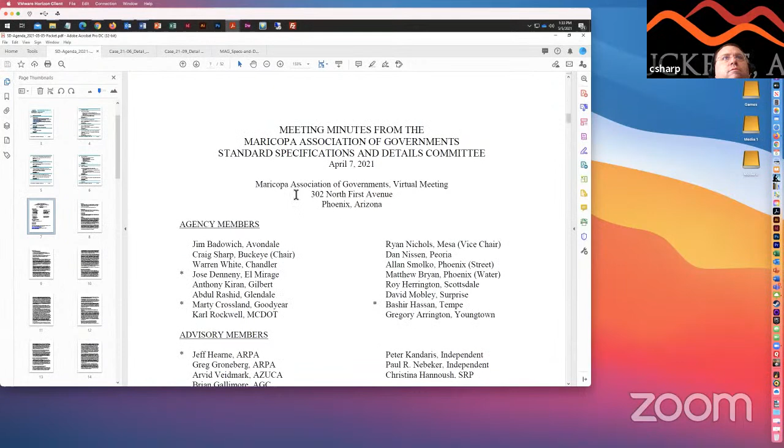Moving on to item number 3. Approval of the April 7th meeting minutes. If everybody could take a minute or so, go through those. And after that, we can do a verbal motion, second, and approval. Maybe about a minute or so. While people are looking over the minutes, I want to pull up the attendance and make sure that if there's anybody that's not on the attendance list checked, let me know.

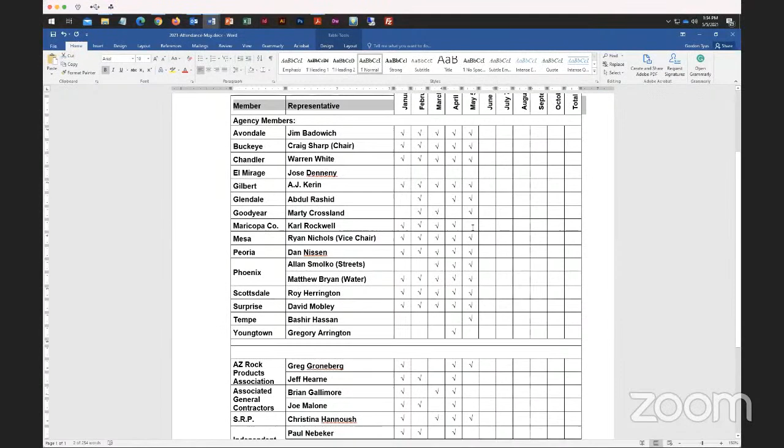So I'm going to share my screen real quick again. So Karl Rockwell, I don't believe was going to be on. Is there someone here from Maricopa County as a proxy for him? Yeah, I'm in. This is Ken Akuare. I'm sitting in for Karl. Okay, thank you. And Gregory Arrington, are you on? Jeff Hearne? Gordon, Jeff had a funeral to attend today.

Okay. Is Brian Gallimore here? I talked to him this morning. He said he was going to be on, but. Joe Malone? Paul or Peter? Are either of you on yet? Peter Kandaris, I'm here. Great, thank you. Okay, thank you, everyone.

So if we can do a motion and second for the approval of the April 7th meeting minutes. We get a motion? This is Warren, I'll motion. Thank you, Warren. And a second? This is Roy, I'll second. Thank you, Roy. If we can get a verbal aye for everyone who's for it, approval. You need to do a roll call vote since we're meeting remotely. Meeting remotely. Okay. Do you have the list up? There we go. It should be up now. Yeah, I've got a number of screens open also.

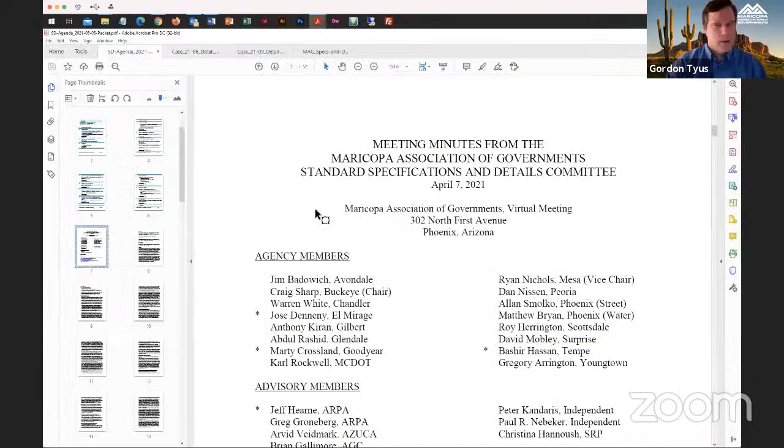Moving on to the staff report. Looks like, Gordon, you've got something there for a back to office plan. Yeah. I don't have a whole lot to report in your packet. I included this handout that kind of summarized what the plan was. And in July is when they're talking about starting phase 3, reopening our office, but they're only going to have a maximum of 15 employees per floor. And there's not going to be any outside meetings in that phase 3.

So it's not until phase 5 when they're going to have the office open to all member agencies and visitors. And the earliest they talked about doing that was in August. I suspect that's not even going to happen. As I was talking earlier with one of our IT guys, they still have to test out putting computers in all the meeting rooms and being able to broadcast Zoom through our video conferencing system and all these things. So I think it's probably likely that we're not going to have any in-person meetings for this committee the rest of this year. We're supposed to get another update at our staff meeting on Friday, but that's about all I know right now.

Do you know, is the intent after, let's say, August, is that going to be a joint in-person and virtual meeting platform? Yeah, when we do start in-person meetings, they're going to continue to have the Zoom meeting option. They want to do that for all the committees that have been doing the Zoom meetings now. And so that also means we need to make sure our meeting rooms are capable of feeding the participants that are in the room, the mics and the video from them, through our Zoom system. And also be able to access the network so I can show you the things that are on here, as I do in these meetings.

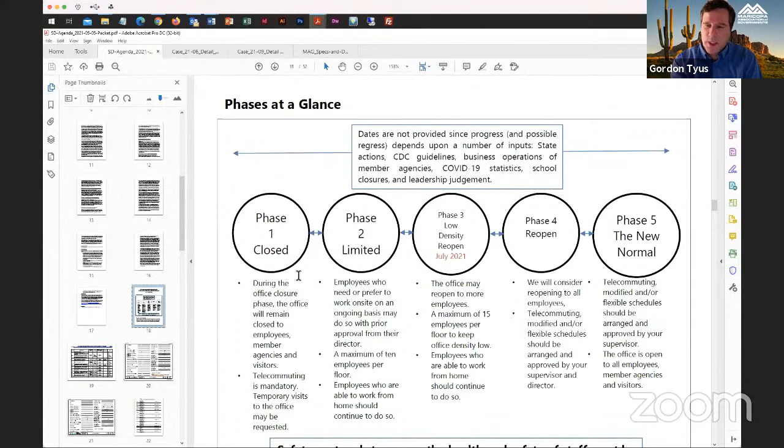So yeah, we're planning on continuing to have the Zoom option available even for in-person meetings, which is going to take a little bit of setup. And also the plan is to continue streaming them over YouTube. So again, we would need to have the Zoom meeting set up because that's how we record the streaming for YouTube.

So is that kind of the new outlook, the new normal phase 5, everything is going to be kind of a combined virtual in-person layout? I think that's the idea, yes. Okay. I'm hearing there's going to be a lot more parking availability in the garage now. Yeah, probably.

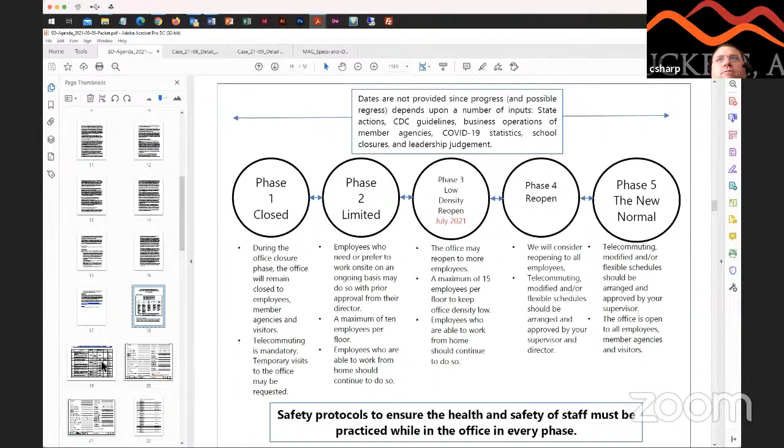I realized that I've been paying for parking for the past year because it automatically comes on my paycheck, even though I haven't been to the office but maybe twice all year. But so yeah, there'll be plenty of parking. Wow. Well, thank you for the update. Any comments or questions on that? As we move through the 2021 year, things just keep getting more interesting.

All right, moving on to cases under consideration, item number 5, case 21-01 miscellaneous corrections. These are the same 3 we've had on there for a while. Gordon, have we had any additions or have we had anybody talking about additions on any others? There's no new additions this month. Okay. I haven't heard of any specific ones.

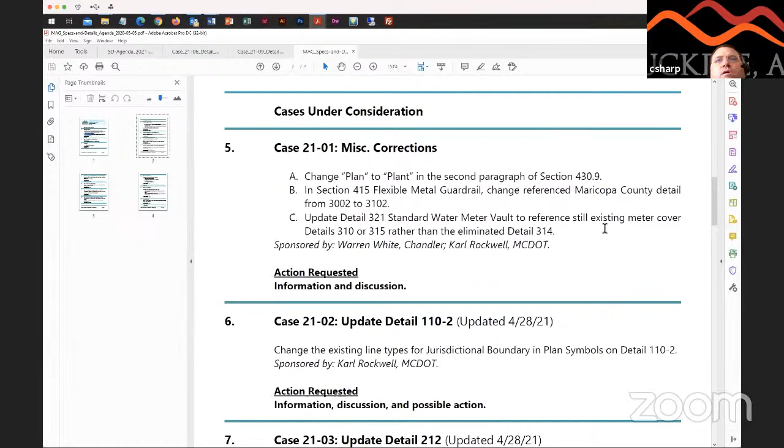Like we say every month, this is for just bloopers, just spelling errors, or maybe numbers that are backwards or something. So if anybody finds anything, just let us know and we'll get it on our miscellaneous corrections. And last meeting of the year, we will go through them and vote on them and see if we can't get our corrections fixed. So with that, moving on to number 6, case 21-02, update detail 110-2.

Karl's not here. MCDOT, is there anybody there that could talk about this case? Yeah, I'm sitting here, but I don't have information. Karl just wants me to listen in. I don't know what he wants me to bring back, but he didn't discuss anything for discussion at this meeting that I could speak to. So MCDOT doesn't have anything.

Craig, I did do a little update based on some feedback I got from Karl. He wanted me to add this note on the detail saying property line option 1 should not be used with jurisdictional boundary option 2, as a way to try and keep people from using these two line types that are very similar.

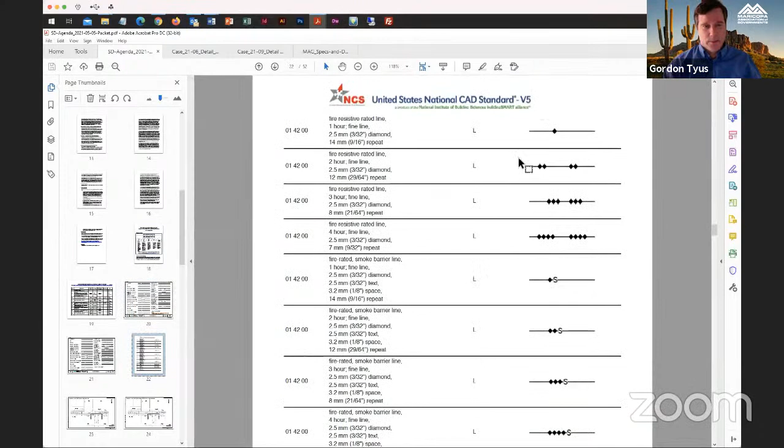There was some discussion at the last meeting if we should add the PL on this property line type as well, and I did some research on that. One thing that I discovered, which is in your packet, is that the national standards are using that line type for the property line. So I think it would be a good idea to leave that as an option without the PL on it, since that's already kind of a national standard that everyone is using. Okay, I tend to agree.

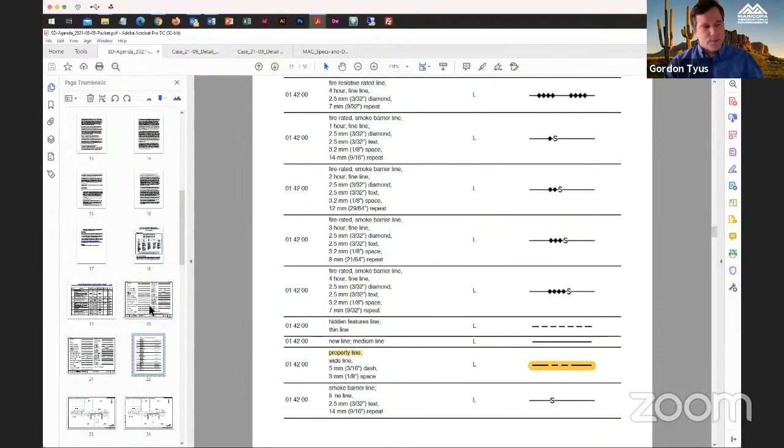Otherwise, it was on the agenda for action, but since there's been some changes and Carl isn't here, I'm not sure if now's the best time to vote on it. I would probably agree with that as well. I don't know if anybody's had a chance to look at that. If anybody has any comments or concerns, I'll open the floor up to any discussion right now.

So I tend to agree, Gordon. I don't think there's any comments. I don't think it would be bad to vote on it right now, but with Carl not here, it wouldn't be bad to push it off till next month, have him present it, and we can vote on it and handle it next month. Let me ask a question. Is what Gordon said in agreement with Carl's proposal? Yeah, that's the information he provided to me to add to his detail.

One thing that seems pretty clear from what he was saying last month is that Maricopa County is moving ahead with using the property line boundary option 2 and the jurisdictional boundary option 2, regardless of whether MAG changes our detail or not. And by changing this jurisdictional boundary 2 from a thick black line to the one with 2 dashes, there was concern from the other members that it's too similar to this property line, which is why that note was added.

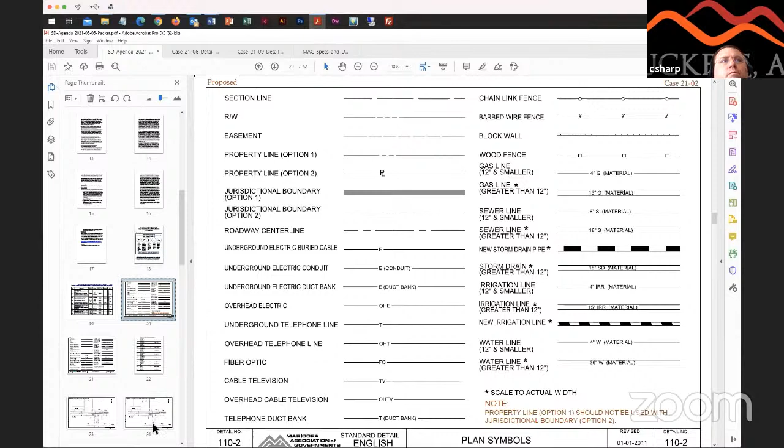Again, just because we have so many different boundaries out here, it's nice to be able to have it stand out. You know, I think what he showed on the samples that were included in here is if you're using option 2, it can be shaded or in the background so that you can see other items on top of it. Whereas the solid black line will cover up anything it's on top of and make it more difficult to see other utilities or line types underneath it.

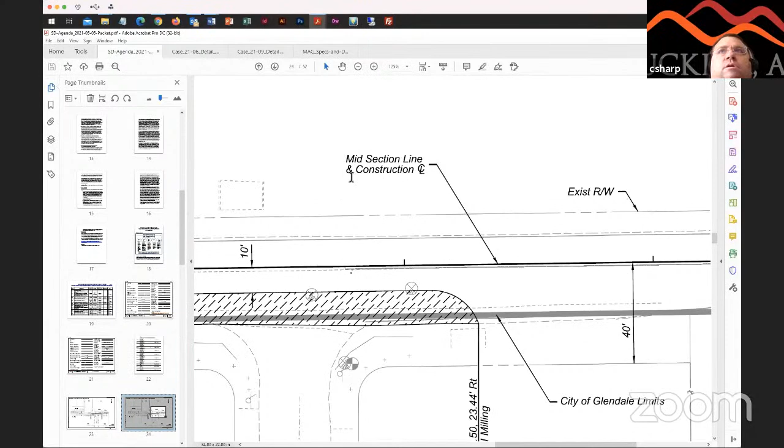Right. So yeah, I'm good with how he's got it laid out. I'm going to make sure everybody on the committee is good with it. But like I said, I would like to have him here with the small change, and he can vote on it when he's here and get this one off of our plate. So not hearing any comments.

Moving on to item number 7. Case number 2103, updating detail 212, the utility pothole detail. I know it's sponsored by Jim, but Arvid, I know you've been working pretty diligently on this. Are you out there, Arvid? Yes, sir, I am. Hello.

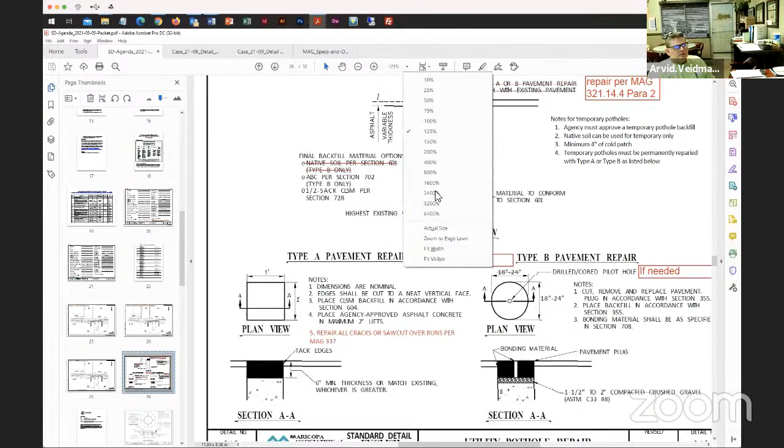How are you doing? Gordon is pulling it up, and after our last meeting and then the working group, what is in front of you is what was agreed upon to present with regards to eliminating detail 213 because of the confusion it would create from a temporary. And what I did is I added the notes that were on the proposed 213 on the right there that were presented at the working group, that the members wanted to have on the MAG 212 detail if a pothole was going to be used in a temporary application.

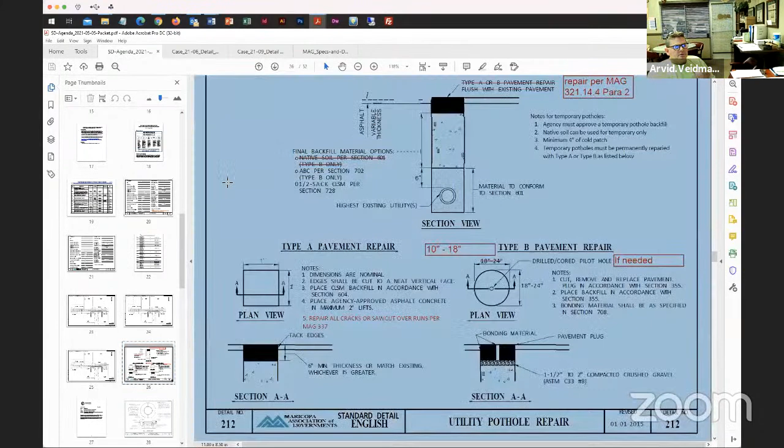We also eliminated, on the left under section view, the first bullet point, which was native backfill. The preference was for it to be either ABC backfill only compacted or a CLSM type material. And then the other items on there, in the upper right, the repair per MAG 321.14.4 is the paragraph that talks about the material availability for replacing asphalt if a coupon method is not used.

And the materials in 321.14.4 paragraph 2, which are becoming more common, the aqua patch, some of these other materials that our agencies are grabbing onto that are permanent in nature because of the engineering in them. They're using those in lieu of just cold patch because of the limited concerns for getting the proper compaction. There was a discussion about doing something on the type A pavement repair that is somewhat

limited in its use, but it is used, and that is if a 1x1 hole, 12-inch by 12-inch hole, is jackhammered into the asphalt to pothole a utility for whatever the purpose, whether it be for locating it for design or for a proposed trenchless application. When that repair goes to be done, there was discussion about using a 2x2 milling machine to mill over that location and produce a 6-inch overlap, a T-top.

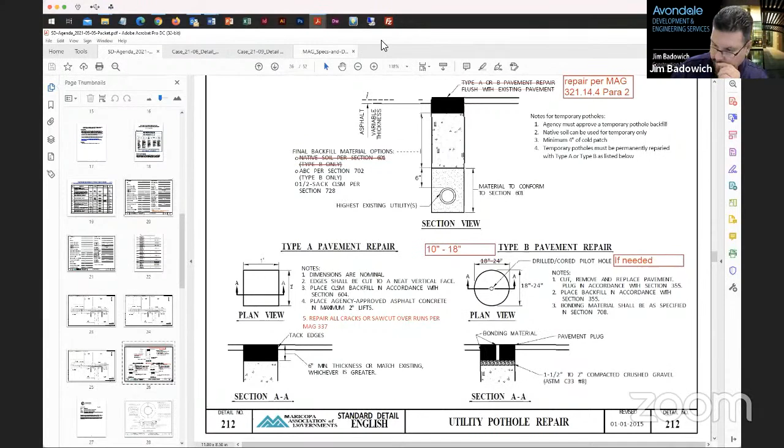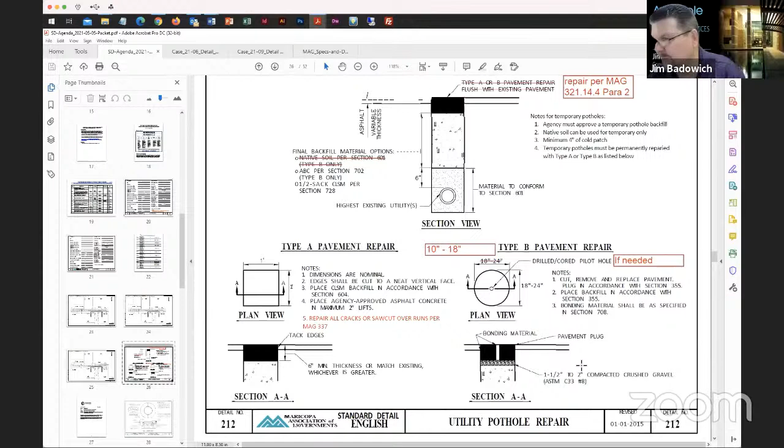One item, just need to know, you have two section AAs. Probably one should be AA, the other should be BB or something like that. Yes, I was going to ask that at the very end about Gordon's opinion on that. I agree with you. I think that should be BB. Type B repair. Okay. Yeah, do BB on the plan view and section view for the type B. There you go. I've changed that.

The only thing that I don't have, Gordon, is a clean copy of the Mag 212 with the drill hole filled up. I'll leave that up to you to move over. Is that okay? Yeah, I've got an updated CAD drawing that I can take your notes and put on. Okay, good. I don't have CAD, unfortunately. Yeah, so that's good, rather than doing more changes to a PDF version.

One last comment, guys, on the plan view for BB, where it's a round diameter, where we have the call outs for 18 to 24 in two places, probably only need it once, right? Or call it out as a diameter. Yeah, the larger 10 by 18 was to suggest changing it to 10 by 18, so where it says 18 by 24, it will go to 10 by 18 in both places. Oh, no, I'm sorry. I see what you're saying, Gordon. I honestly skipped over that. You're correct. We only need it in one spot, because it's just a circle. Agreed. So, any other comments, questions?

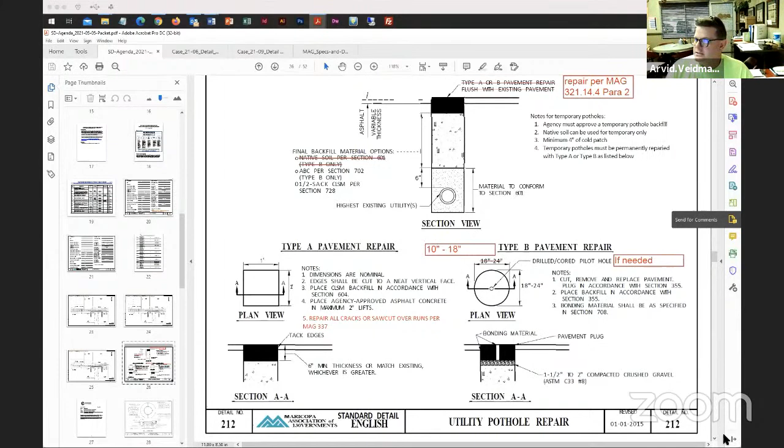And even to that point, even outside of the county, because there's other municipalities that use MAG that are outside of Maricopa County. Correct. Yes. So, no, this is good. I agree with you, Arvid. This is something that I think is going to be used a lot as time goes by, because we're seeing more and more HDD and underground excavation.

Yeah, and again, I don't want to drag it out, but trenchless technology as a whole, the whole umbrella of trenchless with all 13 methods, if there's an existing utility that it's crossing perpendicular or parallel within 5 feet, you need to pothole it and find it to verify it is where it is before you even mobilize the trenchless application.

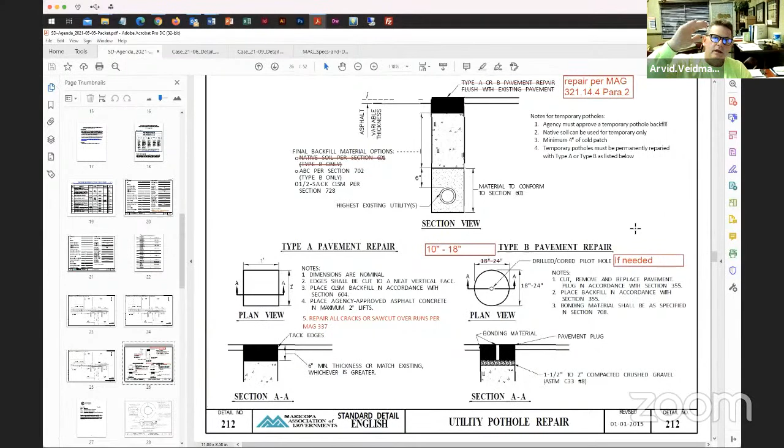Because case in point, we did a 72-inch tunnel down in Tucson, and the agency elected not to pothole a box culvert and find the bottom of it. They went off as-built as to what the thickness of the foundation was, and we got 35 feet into the tunnel and ran into 3 foot of concrete because the foundation of the box culvert ended up being 4 foot thicker than what they thought. And so now you're into a tunnel alignment. We ended up spending a month chipping up concrete as opposed to just potholing it from the beginning and moving the bore down appropriately.

So it is a huge money savings. And the last Purdue report was for every dollar spent on pre-design potholing, and potholing period, saves $4.62 on the construction side of it. So it is critical that it be utilized and be given the opportunity to be utilized properly. Mm-hmm.

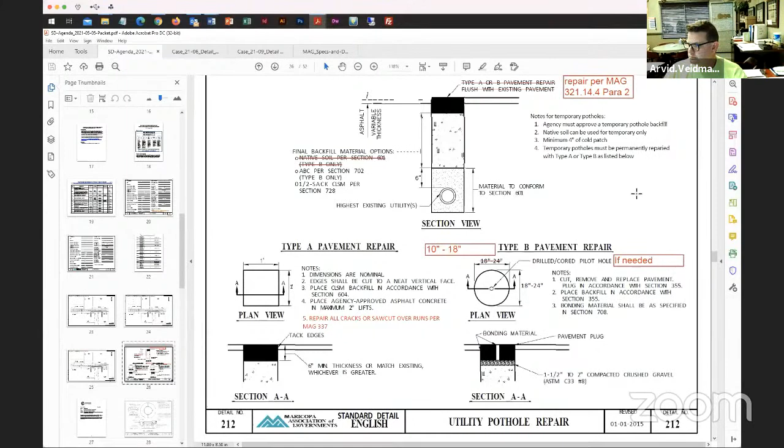So, okay, Gordon, I'll save what I've got and then send it to you and let you do your magic. Yeah, I think the easiest thing would be to add whatever notes you've taken to the PDF, and then I'll make the final corrections in CAD, and we should have it ready. We'll look at it in the working group and give it a once more over. All right. Well, excellent work. Thank you, Arvid. My pleasure.

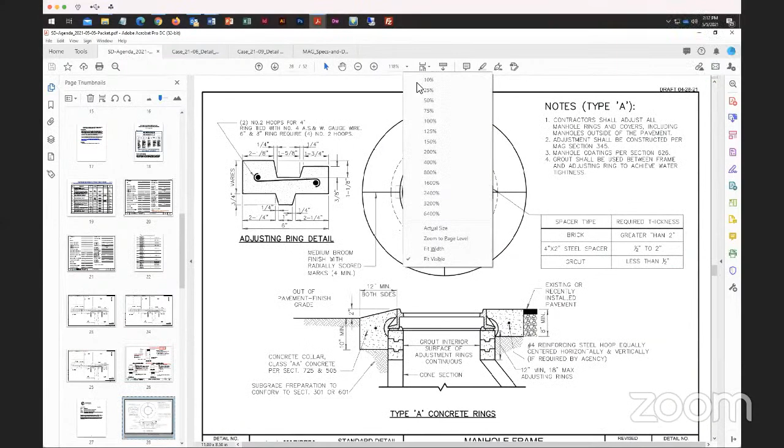Moving on to item number 8, case 2104, updating detail 422-1, new detail 422-2, the frame and cover adjustments. Warren? Thanks, Craig. Nothing new in this update other than changing the revised date for getting it ready for final approval. I know we touched on this in the working group and didn't have any comments or changes at that time. I'll open it up to the group to see if anyone's had a chance to review it or has any comments from their agency.

Yeah, no, we haven't had anything out here. We've had a couple of presentations from each of the manufacturers on these, so. Good.

Hey, Warren. Hey, Ryan. We just had one comment here at the city. The type B ring there is called corrosion protective rings. My group reviewing it suggested renaming that to corrosion resistant rings. Can do that. But other than that, they liked the detail and supported it. Sounds good. If everyone likes resistant better, that's fine with me. Resistive or resistant? Resistant. Okay. This is Roy. It looks like that same term might be used on some of the other notes as well.

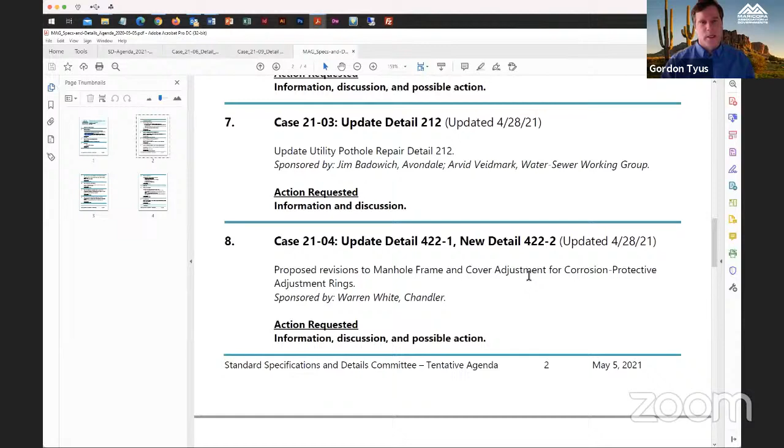So if that's going to be the only change, Warren, do you want to potentially put this up for a vote next month, or you want to go one more round? We can actually do it this time if you'd like with that change. It is on the agenda for possible action today, so okay. As long as that was part of the motion, that would be fine, I think. If you want to go for action, Warren, we can definitely do that. Okay, let's put it up for a vote with that change to the type B, changing protective to resistant. Okay.

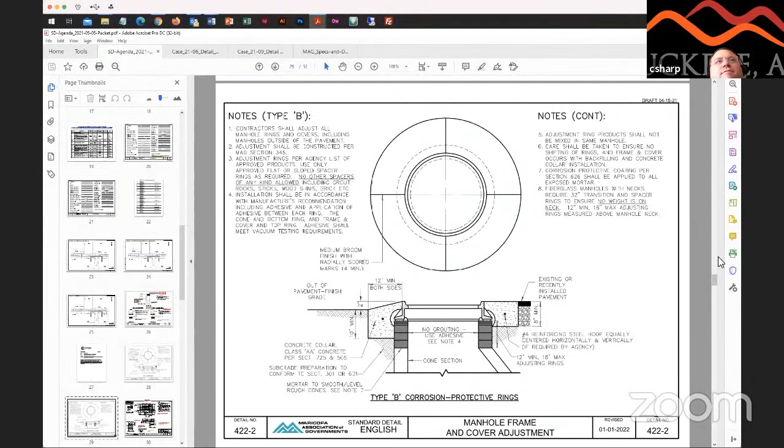I would motion to vote on it. Any seconds? I second that. Okay. I think since you're chair, we'll need to have Warren make the motion. Okay. I will motion then. There we go. I'll still second the motion. All right, Gordon, if you could throw up the roll call. Sure. Okay. Again, this is for case 2104, updating detail 422-1 and detail 422 to detail 422-2.

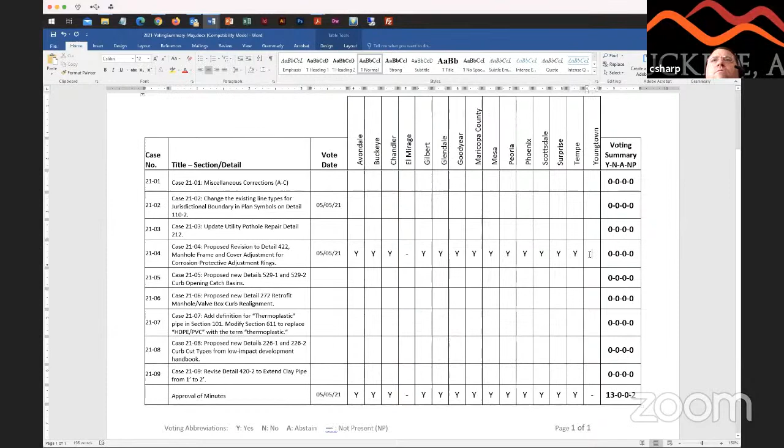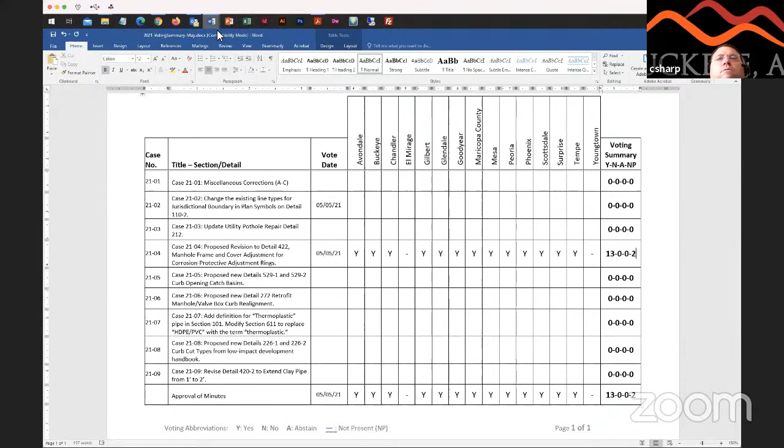Avondale, yes. Buckeye is a yes. Chandler, yes. El Mirage, not present. Gilbert, yes. Glendale, yes. Goodyear, yes. Maricopa County. Yes, I think it's a proper change. Okay, Mesa, yes. Peoria, yes. Phoenix. Al Smolko, yes. Thank you. Scottsdale, yes. Surprise, yes. Tempe, yes. And Youngtown, not present. So case 2104, detail 422 has passed. Thank you, Warren. You're welcome. All right, and Warren, if you could send me the final CAD drawings once you've got that final change done, I'd appreciate it. Will do.

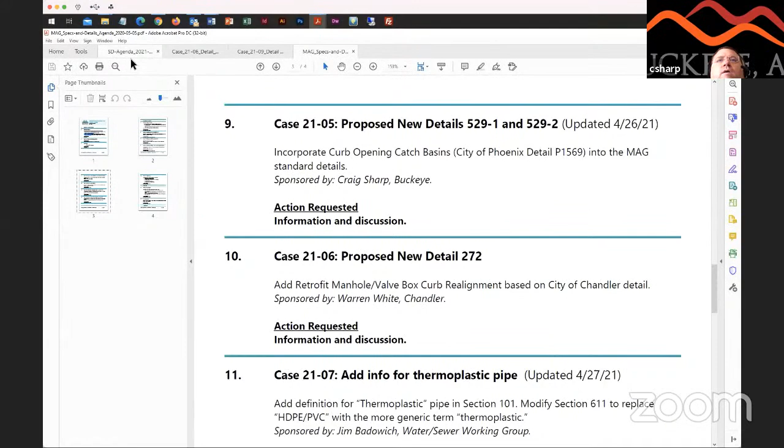All right. Well, thank you, everybody. Moving on to item number 9. Case 2105, the proposed details 529-1 and 529-2. It's the curb opening catch basin detail. Used to be the City of Phoenix, actually still is the City of Phoenix detail P1569, into the MAG standard details. So if you can pull that up, Gordon. So I did have some comments from Maricopa County on clearly calling out reinforcements. I noticed also there in section AA, it's calling for a clearance for all reinforcement, but it's not specifying the dimension. So the 529-2 actually shows a dimension, so it's 1.5 inches clear.

Maricopa County asked for some discussion on the wall thickness in the lower right corner of the detail. He was talking about the detail size and maybe changing the size of the detail to make it maybe a little larger, I think is the way he was talking about it. And some of the reinforcement in section BB, he would like that to match the reinforcement that's shown in the plan view.

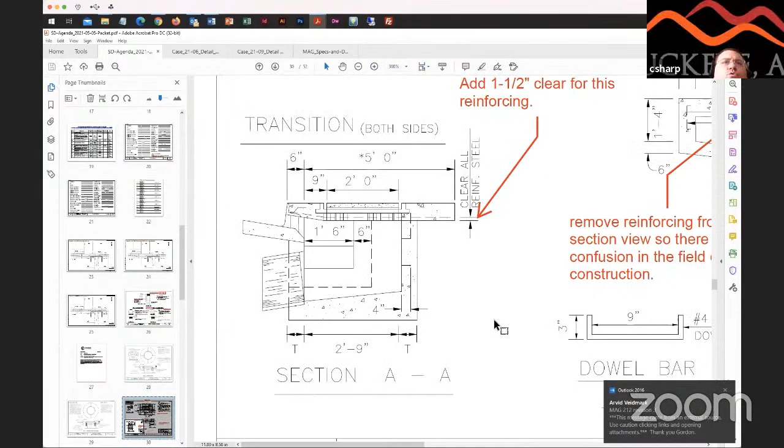So one other thing that I did notice, I don't know if you can zoom into it, Gordon, section AA in the lower left. I'd like to throw it out to the group. I've asked pretty much everybody in our departments. You see that 4-inch dimension there? I have no idea what that is for. And I've gone back in details over the past number of years, and that's been there, and I don't know why it's there. So if anybody can shed some light onto why it's there, I'd like to put a note to it or something. Otherwise, I'm thinking about removing it.

I don't pretend to have the answer, but it sure looks like it lines up with the overlap there at the top in the sidewalk area with the... yeah, what is, I'm not even sure what that is. The ring and cover up on top? The ring and cover.

Yeah, I'm not sure. I originally looked at it thinking, okay, maybe they were showing that they were going to pour the bottom of the catch basin first, and that's a piece of steel that ties the walls and the bottom together. My inspectors kind of laughed at me and said nobody has ever done that. But yeah, I'm going to throw it out. I don't know why it's there. I don't have the answer. So if anybody can maybe shed some light. And it could be with the alignment of the ring and cover.

Do you know what this hidden line is supposed to be showing here? Yeah, what that is, the dowel bar that's right there to the lower right, that's the dowel bar that connects the walls to the deck. That's shown on the plan view in 4 different locations. I believe that's what that's identifying. Maybe that's what this dimension is also trying to show. Yeah, that's what I think.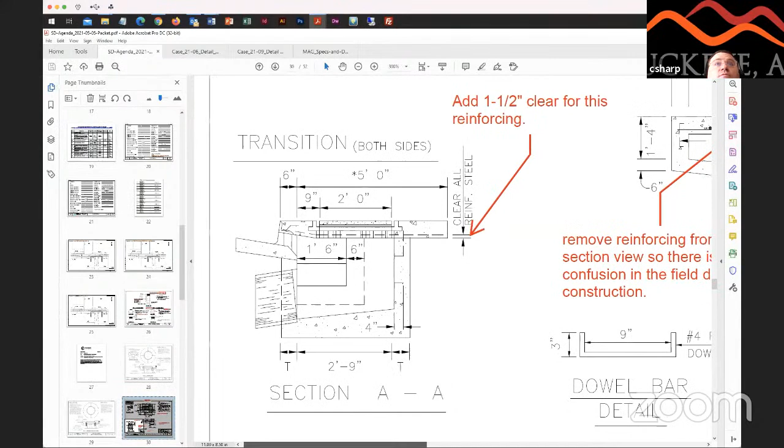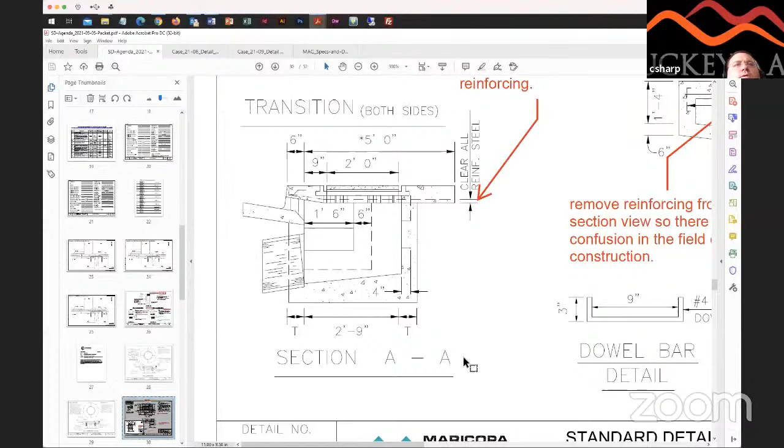Maybe what I'll do is I'll trim that back a little bit and see if I can't show it with a little bit of space in between the end of the dowel bar. Yeah, I'll have to look at it and see how I can do it. But yeah, we looked at that for a while and we couldn't come up with the answer. But that very possibly could be it. So if there's any other ideas out there, I'm completely open to any suggestions. But I'm thinking that maybe that's exactly what that is, it's just an offset for that dowel bar.

Hey, Gordon, could you scroll or pan to the right? Okay, thank you. Yeah, so that's showing the dowel bar how it's connecting the deck with the walls. And I guess kind of in that upper right corner of section BB is similar to that other section AA where it's showing the dowel bar. Yeah, right there. Well, actually, it's the vertical piece where the dowel bar would be. It would be basically to the right of those 4 horizontal bars. That piece right there, yeah.

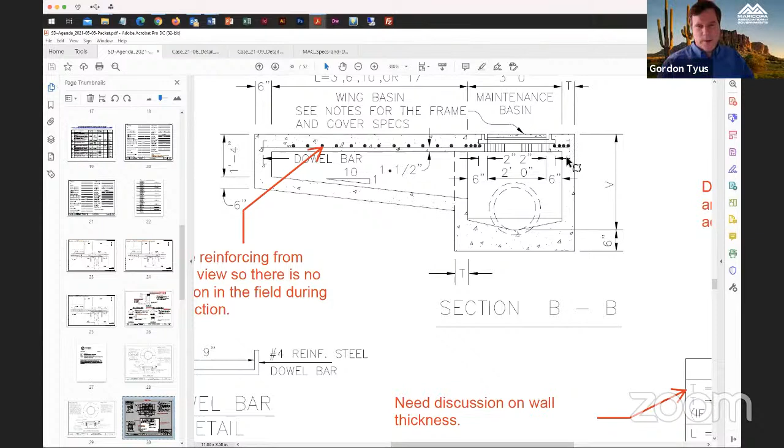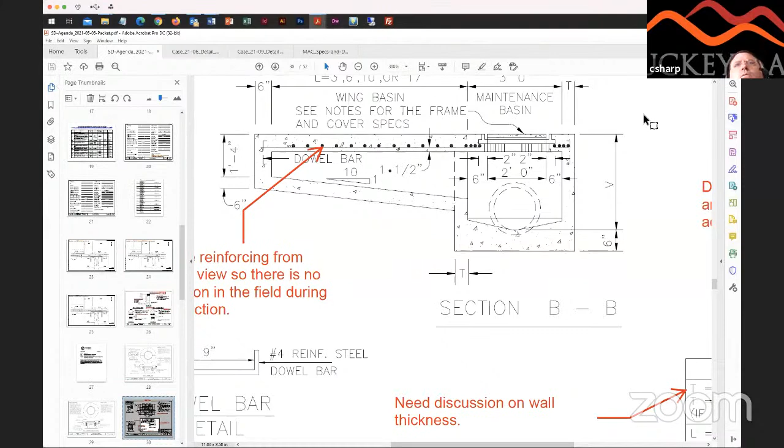So from here to here is maybe 4 inches. That's what I'm thinking, because the hook on that dowel bar is 3 inches, which gives you a 1 inch clearance from the inside of that structure wall. Which on a non-earth retaining side, 1 inch is probably adequate. But anyway, so these are the comments that MCDOT came up with. I wanted to bring them up in the meeting today to see if anybody had any thoughts on it. Yeah, if you can go back to full screen there.

Craig, I've got some questions or thoughts on the wall thickness. Okay. The note says need discussion on wall thickness. Is there a concern that those wall thicknesses are not working for the depths, or what was that based on? Can you talk in more detail on that? Yeah, the comment that MCDOT gave is instead of basing it on the height of the structure, 4 feet or less being 6 inches, or 4 feet or more being 8 inches, just calling it 8 inches total.

I don't have a preference, but I do know that it could be a cost savings. I mean, not much, mind you, but could be a cost savings if you are 4 feet or less. Now, help me out on that also, because I'm looking at that same table there, and it says V equals 4 foot 0 inches minimum, unless otherwise noted. So that first thickness, T equals 6 inches if V equals 4 feet or less.

So, I mean, are we building? I guess that accounts for 4 foot exactly catch basins, right? And that's pretty much the only condition, unless you're specially designing a catch basin to be less than 4 foot in depth. And that might exactly be what the county was talking about. So I'm interested in thoughts on that, but also I'm quite curious. It seems like we have catch basins that exceed 8 feet pretty frequently.

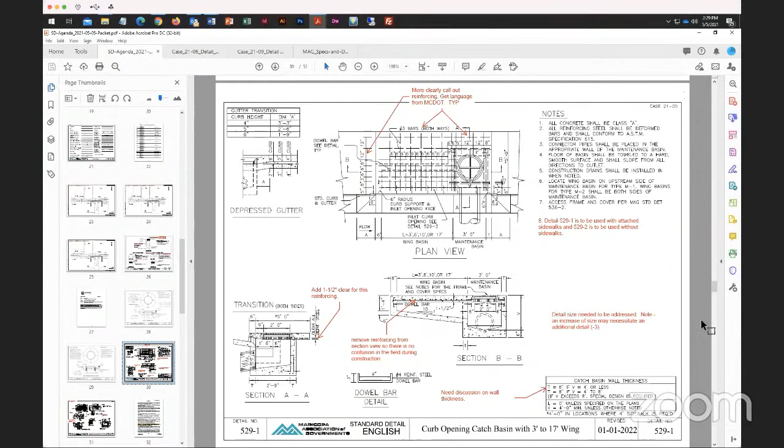Hey, Craig, this is Warren. For that note 8, how about instead of adding it as a note 8, we just update the title. So curb opening catch basin with 3 to 17 foot wing with attached sidewalk, or the other one, retitle it no sidewalk, something like that. Then it'll be real clear what the differences are in those details.

Gordon, can you go to the -2 detail? So let's see. Yeah, I think we could. There's some details on the -1 that go to the -2, but the -2 basically is just saying that this is a catch basin in an area that does not have sidewalks. So yeah, I think we could change the name.

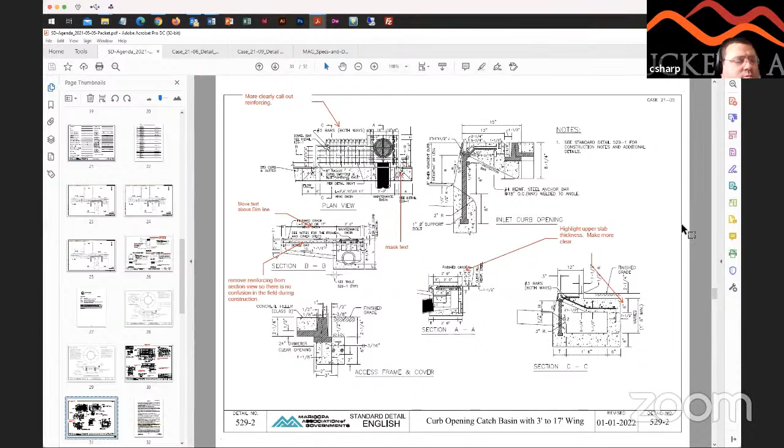And likewise on -1, where we talk about sidewalk, where you're looking at section AA, where it's 5 foot asterisk sidewalk, we may have instances where there's different sidewalk widths, like 6 foot or more, right? So maybe we think about sidewalk width per plan. I don't know, but I know we use catch basins on arterials too, and different widths of sidewalk.

So you're talking in section AA, right? Uh-huh. I guess even in the plan view too, where we have the 5 foot width on the sidewalk, but that's not always a 5 foot sidewalk. It could be on a collector, it could be different on different roadways, right? So what I've seen before is even in just the construction sequencing, the catch basin is going to go in before the sidewalk. And the sidewalk typically is then poured around the catch basin with an expansion joint.

So I think what the detail is showing is it's a 5 foot dimension for the structure. If you're going to have a larger sidewalk... So I'm sitting here talking about this and thinking about it at the same time. So I hear what you're saying. If we're gonna have a larger sidewalk, then I'm thinking about the reinforcing also, because if you look at the plan reinforcing, we go all the way out basically to the edge of the sidewalk. So if we extend it to 6 feet, 7 feet, 8 feet, 10 feet, are we going to have to extend the reinforcing?

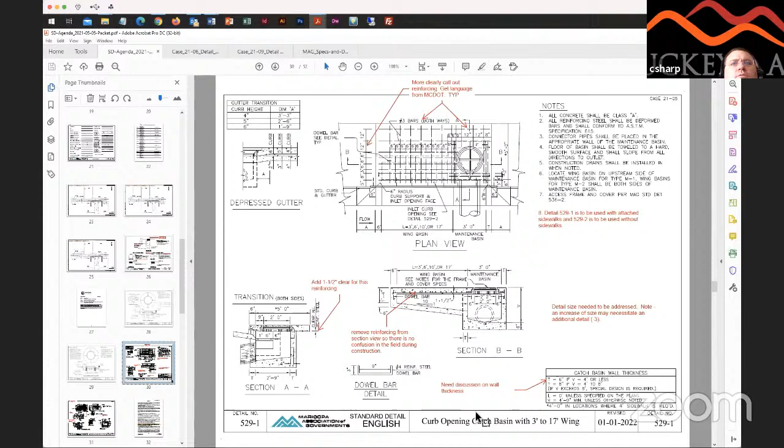Okay. Well, actually, I think what I'll do is I'll make the changes to the wall thickness based on our discussion today. Because yeah, I think we're right. If we've got a minimum 4 feet, unless otherwise noted, if we could just make the walls 8 inches thick, then there's no questions. It's just trying to simplify things. And honestly, how I've seen catch basins built, contractors don't pay attention to the outside dimension. They form the inside and they pour up against native. So I've had some walls 8 to 12 inches thick. Anyways, any other thoughts?

Craig, this is Warren. Just one last comment on note number 7, where it says access frame and cover per MAG standard detail. We can drop the MAG standard and just say per detail 536-2. Okay, I'm sorry, say it again. Note 7 can just say frame and cover per detail 536-2. 536-2. Okay, that makes sense because we're already in MAG. Okay, that's definitely doable.

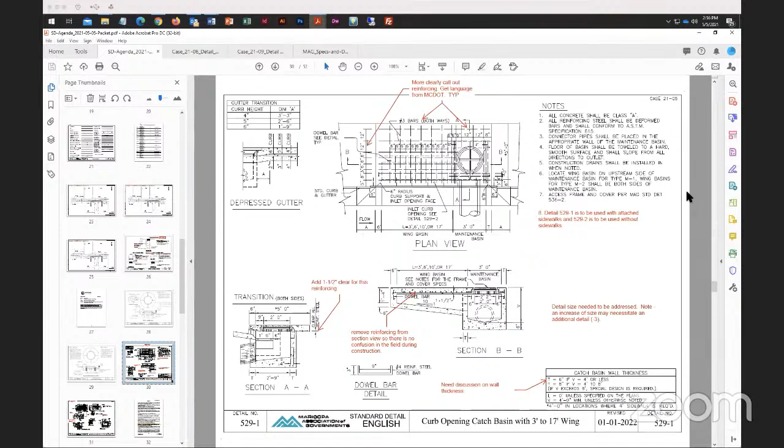Greg, this is Roy. I just had a comment on the second page, that 529-2. We're just looking at the City of Phoenix detail, and it looks like that one isn't just without a sidewalk, but also the back wall of the catch basin is recessed, so the top of the frame is actually exposed for any kind of landscaping or whatever you've got back there.

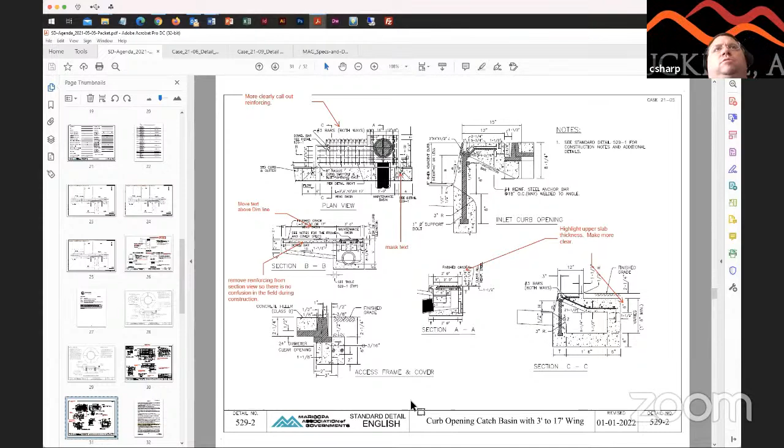Yeah, if you actually look at the plan view on the same detail in the upper left-hand corner, the frame and cover is actually blocked in. So it's not just laying in the landscape area. It's blocked in and around it. But yes, it is depressed. The concrete itself is dropped down.

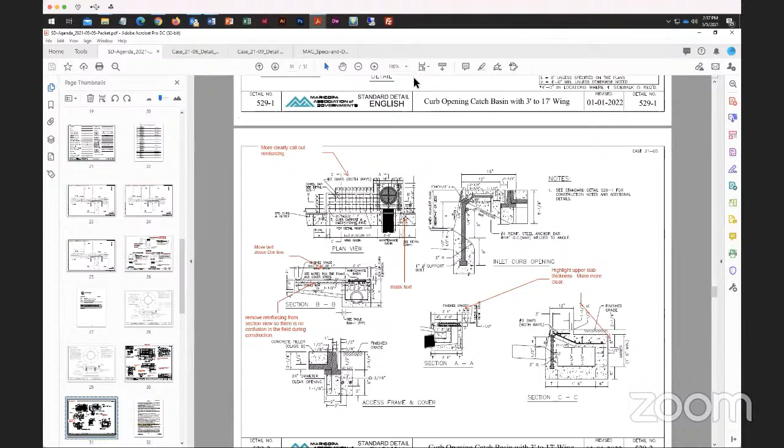Hey, Greg, it's Robert Avondale. What do you got, Rob? Yeah, I don't know if this is the place to put in the detail. I have come across a situation in the field before where the pipe is short of the catch basin. Sometimes it's 3 or 4 inches short. Sometimes it's 6, 8 inches short. As a rule, I usually have them put some rebar hoops around the sonotube.

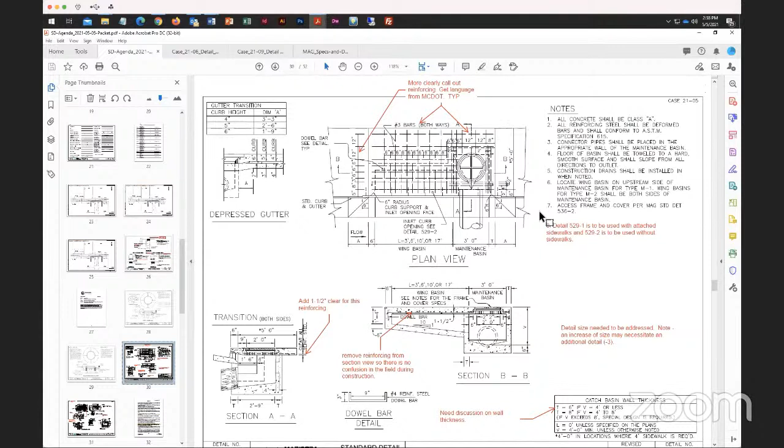You're talking down on the -1 detail? Yeah, I can't really see it too well from my screen. But I just know in catch basins in general, I've had that issue in the past. And I don't know if that's the place to address it in detail or not. So that would be right there in the section AA, in the lower left-hand corner. Yeah, that might be a place to have it. I don't know if there's a note saying that or not. I can't see real close from here.

Yeah, I think we need to specify a maximum gap too. If it's 1 foot short, then they need to go in and redo the pipe because obviously there's a mistake there. Again, is that something we want to put on a detail, or is that something that needs to be in a specification? That's more of a pipe laying specification as opposed to a catch basin detail, wouldn't it be? It's possible, yeah. It could be a spec. Just one of those things.

It seems like it happens a lot, and then everyone's pointing fingers, and they're sitting there trying to form for the catch basin, and it's always kind of a field fix, something I learned years ago. But I don't remember seeing anything in MAG that's definitive on what we should allow and when they should not be able to do it at all. Right. I always feel like it's just a field fix. I think it'd be better to have everyone chime in and see what makes sense, so we're consistent.

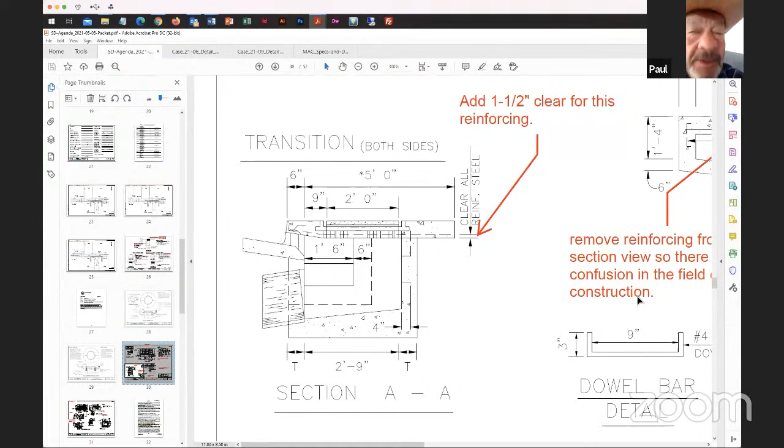All right. Let's definitely bring it up and see if we can come up with some language and some details on this, and see if we can't solve a few problems. Yeah, sounds good. Thank you, Rob. Sure.

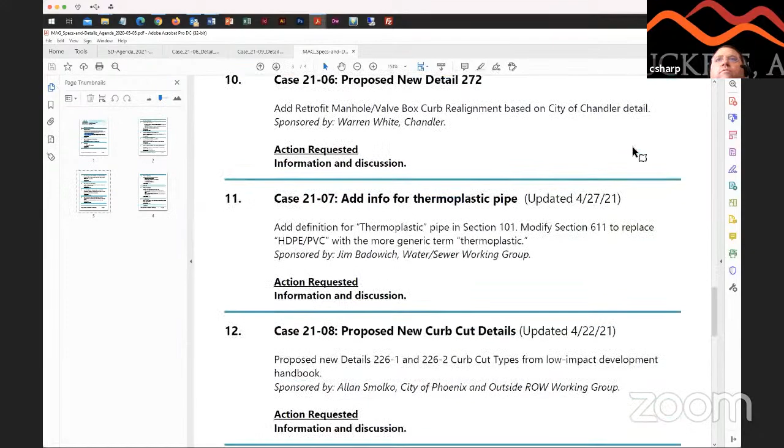Any other comments on this? I do appreciate it. This is something that has been around for a long time, and I think everybody's probably built them. We've all just made some workarounds and made it work. But if we can improve it, I'm all for that. All right, not hearing anything. Let's move on to item number 10, case 2106, proposed new detail 272. It's the retrofit manhole and valve box curb. Warren?

Are you out there, Warren? He did say that he would have to leave early today, so.

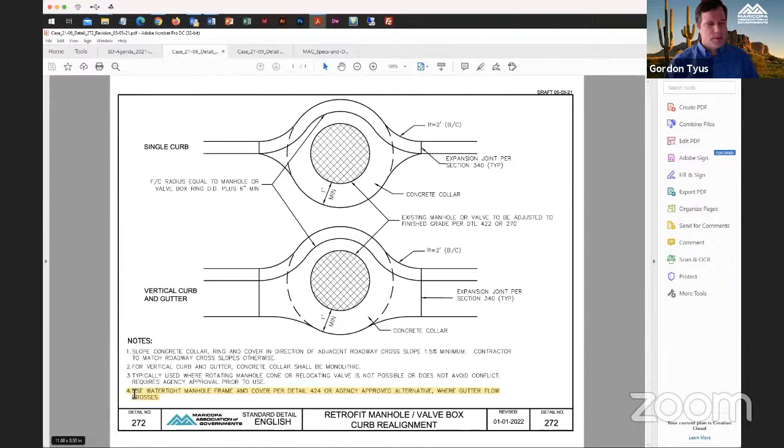Yeah. I did receive this detail from him this morning, and I think the change was updating this note about the watertight frame. Okay, and that was one of the things we discussed in the working group is, if you're going to be up against a curb and gutter, that's where you're actually going to have water, unless you're at the high point, which would be the single curb at the top. But

did we have, no, we did not have this up for action. So we can have everybody look at it one more time and see if they have any comments. But not hearing any right now.

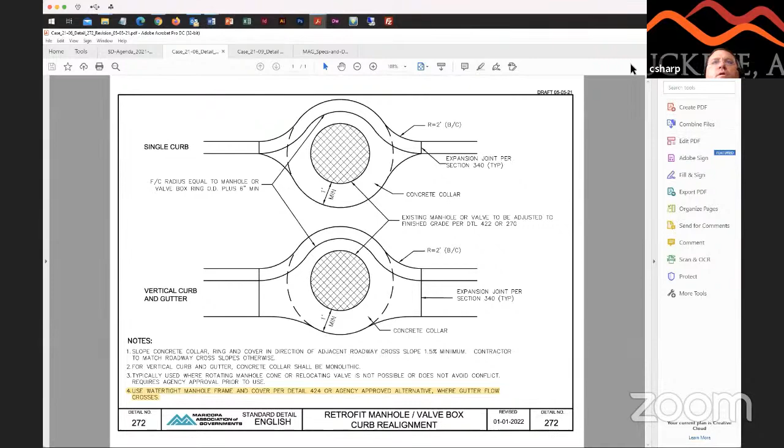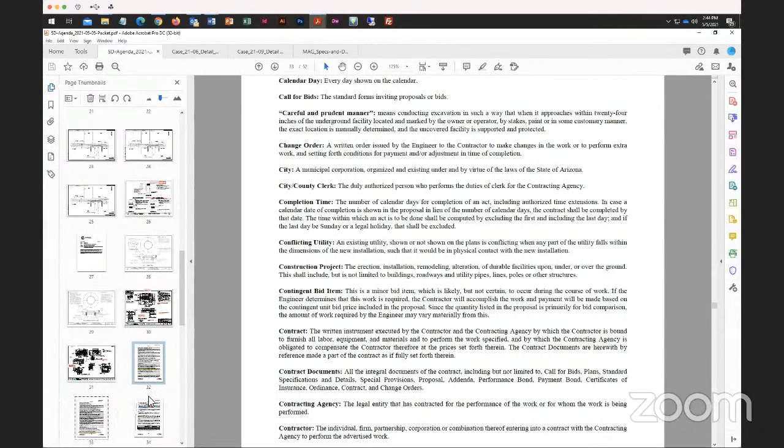Moving on to item number 11, case 2107, adding information for thermoplastic pipe. Jim, I know you've been working on this with the concrete guys. Yeah, I have. So I think we got the latest one up here. We had to add a definition, so we did a little revision on the definition. And then one thing, definition for deflection. Yeah, he sent me this new one.

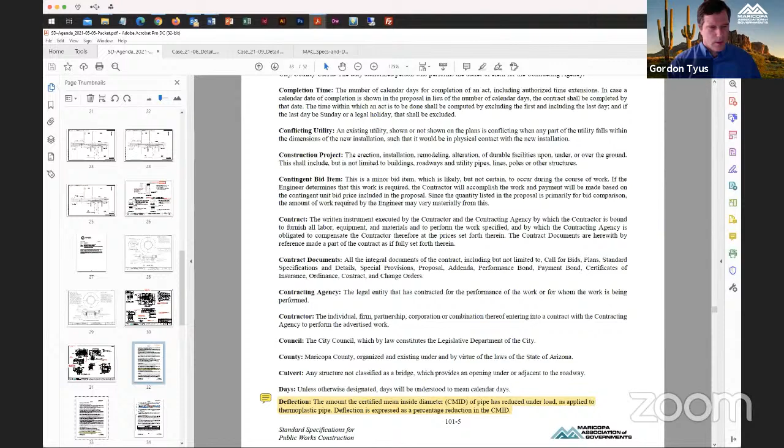And he also had some changes in the text here. I know in the working group, he brought up the issue of this "if any" text being kind of weasel words, so right. I wanted to remove that and then add that any remedy is performed as required by the agency. Right. He also thought the correct word was not the average, but the mean inside diameter. Okay. So I think that was it. Yeah, I think those same things are duplicated on this section as well. So. Any questions from anybody?

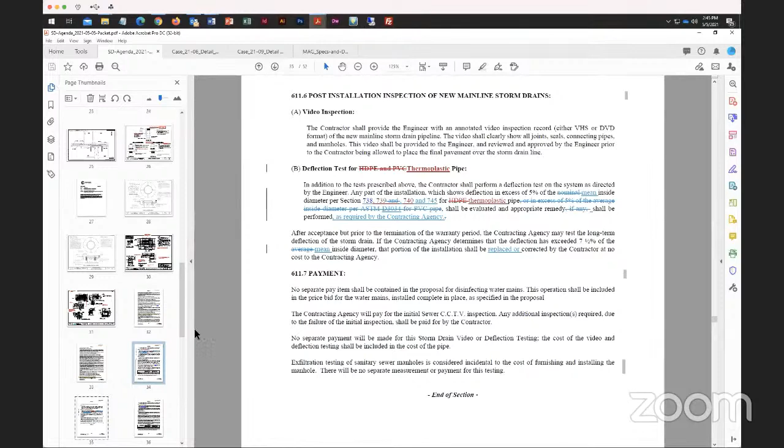I have a question. What's the difference using thermoplastic pipe or just plastic pipe? What's the difference? Well, the plastic kind of falls under the umbrella of thermoplastic. Yeah, we kind of skipped over that definition, but we added this definition for thermoplastic. Oh, yeah, there it is. Okay. All right.

And the intent and thought behind that was we are getting into so many different materials in terms of pipe types that instead of trying to specify HDPE, polypropylene, PVC, SRPE, we just came up with a general thermoplastic, which they all fall under in terms of the trench type, because once you start talking trench type, then it's different than a rigid pipe. So that's where the thought came up.

Okay, because elsewhere I had read, I don't remember the section right now, it was about the kinds of pipe, flexible and rigid, and the plastics and the metals fall under the flexible, and the rigid is under the concrete, and maybe the clay and other ones.

So I just asked about thermoplastic because I was doing something for McDowell; we're dabbling with coming up with some pipe selection methodology. And so we've been talking about plastic pipes and then either metal or concrete. So I'm just trying to see now. I know there are other uses of pipes here beyond just drainage, and that's perhaps where thermoplastic has a wider range. So I was just asking from curiosity.

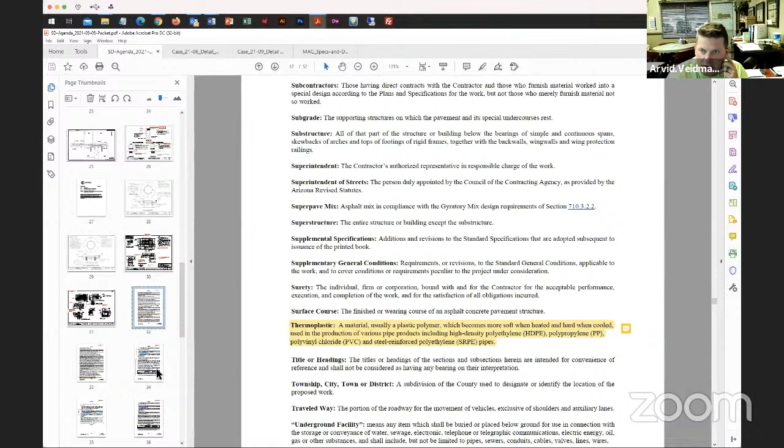Yeah, I've seen water lines that are in HDPE, sewer lines that are in HDPE. Water lines are PVC. I've seen storm drain PVC. There are various applications you can use for the various types of pipe. There's also the fusible thermoplastic HDPE and PVC that's becoming more and more common because it allows for long trenchless applications without the concern of a joint ever failing. Mm-hmm.

And I think one of the issues was that in these testing specs, it only referenced HDPE and PVC. And since there are these other ones, they weren't required to be tested for deflection because they weren't listed. So the thermoplastic term is to try and group all of them, so all of them are playing by the same rules as far as the testing. Right. Yeah, that was the onus, actually. You're right, Gordon. And that's where the different thermoplastic pipes fall under the flexible conduit specs.

So, and the iron pipe, for example, may be considered flexible, but it doesn't have the same kind of deflection as the plastic pipe, so not really included here. Correct. So yeah, ductile iron is a lot different than, say, CMP pipes. Right. They're both a metal. So any other questions? No, not from me. I think we shall adopt that. We shall adopt the thermoplastic terminology there.

All right, thank you. So if we don't have any more discussion, then Gordon, I'd like to see if we can maybe vote on this next month. Yeah, that sounds good. So maybe we'll go through one more cycle on the working group. So if anybody has anything they want to come up with or add to it, let me know for the working group meeting. It'll be later this month on the 18th. So, all right.

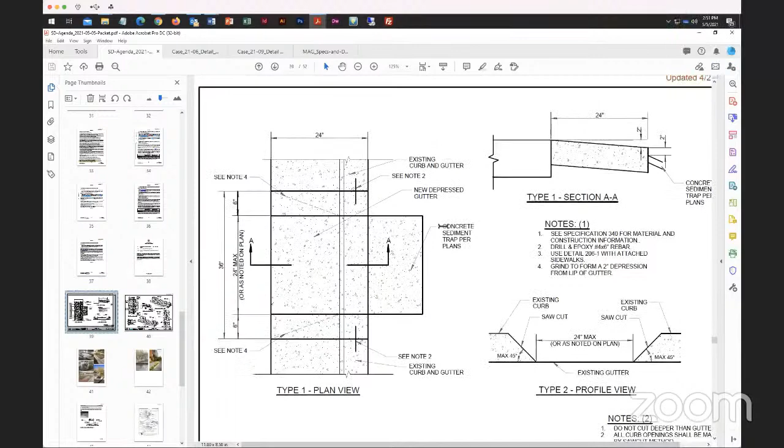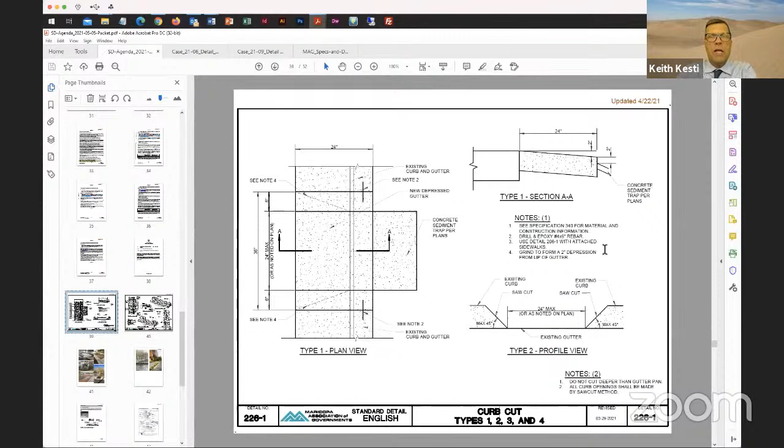Let's see. From our last meeting, I've made 3 changes, 2 from this committee and 1 from the work group. For this committee, I had note number 3 that had to do with the standard detail 206-1 and attached sidewalks. It didn't make any sense the way I had it last time, so I've modified it for this group's recommendation that we're just going to use the detail with attached sidewalks. And then on page 2, the same note occurs, and on the isometric for type 3, I had an incorrect dimension there. So I've got that fixed.

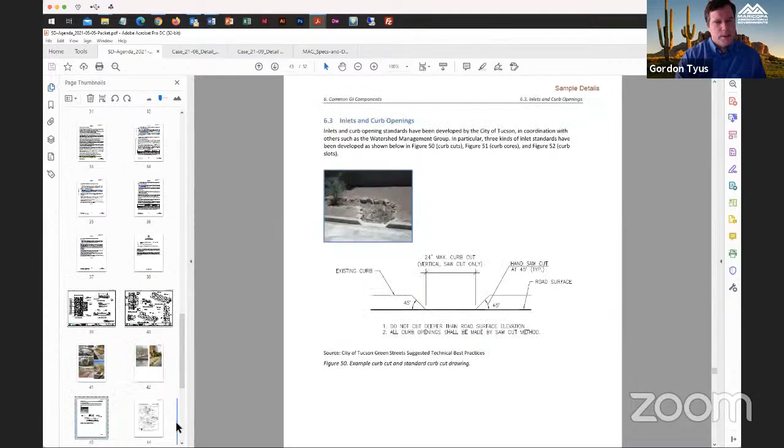And yeah, because we had 8 was supposed to be on the inside on both, and then 6 on the outside on both. And then also I had some of my warp lines incorrect, and somebody in the work group pointed that out, so I've adjusted those. So those are the 3 changes that I've made since the last time you looked at this. So open to any questions. The other thing that was included in the packet were some of the photos and other details from other agencies just as reference. Thanks, Gordon. I forgot to mention that. Appreciate your help.

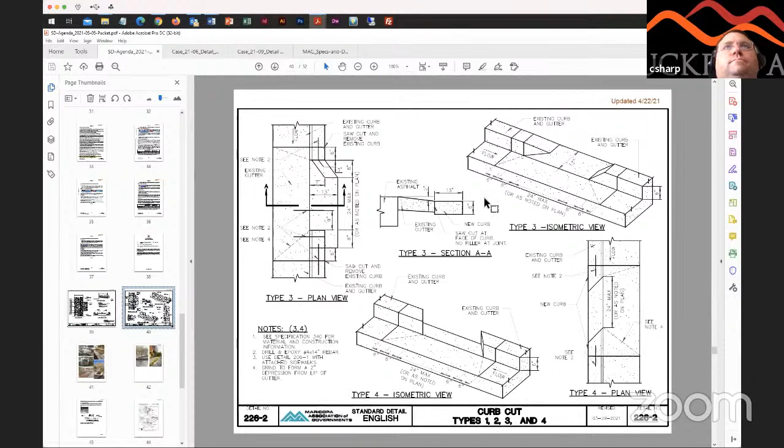Gordon, if you go back to the 226-2 detail, just real quick, Keith, type 3 in the isometric view. Oh, wait a second. Actually, in the type 3 plan view, now I understand why it's 13 inches wide, because it blows out in the backside. I was going to say, does the top of curb really 13 inches, but okay, I'm seeing it now. Yeah, it took me a while to get that figured out too. So I got you now. I'm on board with it. All right. I don't have any questions. Working on these outer right-of-way details, it's getting kind of nice. We can start getting that portion of it going. All right. Not hearing any other comments or questions, concerns.

Moving on to item number 13, new and potential cases. Potential cases for 2021. Jim, you guys are still working on the water hauling requirements, right? Yeah, I thought that maybe this was going to be presented this month, on the water hauling one. Is that something we could still present, Gordon, at this meeting? I don't know if I have the latest update that you want to present, so. Oh, okay. We might need to wait on that one. All right.

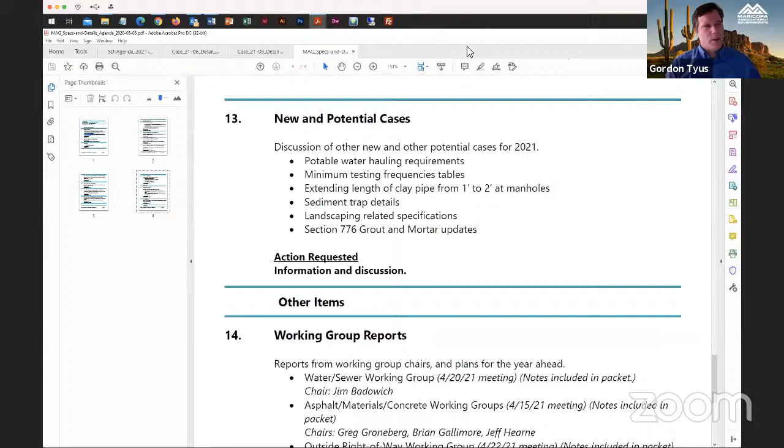And the minimum testing frequencies, Rob, are you still on? Yeah, I'm still here. Did you want to talk about that a little bit? Sure. Yeah, we're going to meet again tomorrow for the subgroup, but it's coming along pretty good. We've kind of got it down to one table again. We went back and forth. Did you want me to pull up the one that you just emailed this morning? Sure, if you don't mind. We can handle some of the stuff, it looks like, with footnotes. We've been meeting every couple of weeks virtually, with a lot of good back and forth discussions. Gotten more of a concise table.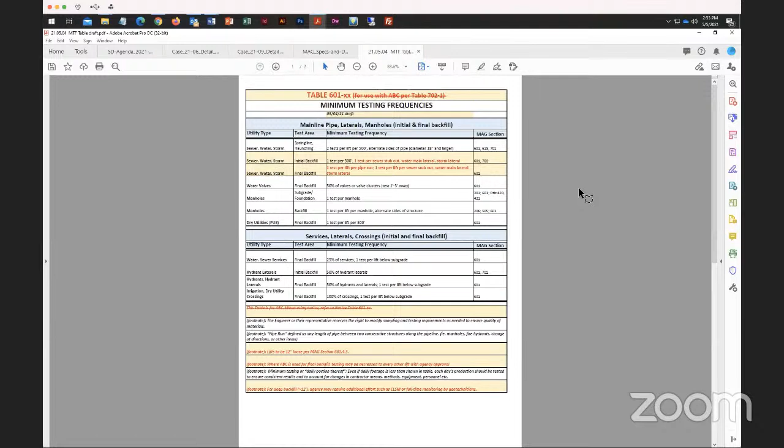Let me see. Here it is. And we basically have it for water, sewer, storm, manholes. We did add dry utility PUE in there. I think we should have some testing of that. Mm-hmm. Then we've also got miscellaneous stuff below there, like water services and hydrants, utility crossings.

Yeah, I like the footnotes that we talked about in the working group about the pipe segments or the pipe runs. Sorry. Yeah, that's what I was saying. I was kind of looking at MAG; it doesn't really have a general overall definition. I mean, I think people probably understand what a stub out is, what a lateral is, but I think it's good, yeah, to get tests on those. Mm-hmm.

If I can interject real quick, one of the reasons I think it's really critical is because we have a project in the West Valley where the stub out to the north is 0.6 lower than the invert of the sewer. Wow. So we're going to have to tunnel in underneath the road and fix the problem for the developer. And it was stubbed out a couple of years ago during the road widening. Was it a settlement issue? What was it?

It's hard to tell on the camera, but it appears that there was an extension of the 5-foot stub, and when they either backfilled it or settlement, it fell, and it's obviously not workable. And so it's just, again, one of the truths that when you have mainline installed and then you have stubs being installed, it's so critical to make sure those stubs are, one, extended far enough, and two, that they receive the same attention, because what's the point of a stub if it's not going to be able to be used? And now you got to open cut the whole road just to get to the sewer.

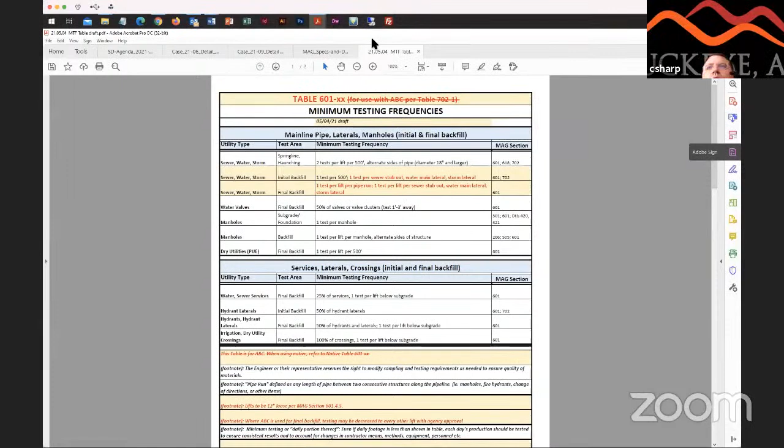Yeah, that's true. So I think the table, I think we've gotten there, there's still some stuff. I think there's room for discussion, just with the working group itself before the general, but hopefully Jim can present this as a case in June. Yeah. No, we will. We're far enough along. I think it's ready to go. Yeah, I think we've got 90% of the work done. I think so too.

No, I want all the agencies now to take it back to their appropriate staff and have them start looking at it. And we do have a good representation of quite a few cities and private labs also in the group, which is helping quite a bit.

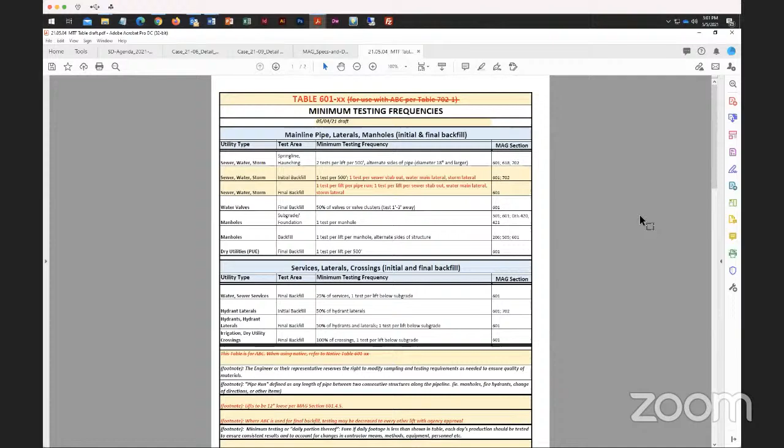Did you add a note on this about the deep backfills, what we're going to do there, or are you still going to talk about it? Yeah, I did. We kind of talked about it last time. I put a footnote on there: agency may require additional effort such as CLSM or full-time monitoring by geotechnicians. There it is, put out there. I thought about putting just full-time monitoring, but we probably should state who, the engineer or something. And I just put deeper than 12 foot. It was kind of an arbitrary number.

I don't know if we can require that in MAG, I don't know if anyone's doing that or not, but I think it's a good place to start. We can at least make a note at the table and then go from there. If every agency wants to require that later, we could, or we could require it in MAG maybe one day. Maybe you change the language to say full-time monitoring as required by the agency. Oh, sure. We could do that.

Yeah, because when we're getting these deep excavations, nobody wants to go down there and test it. It comes down to more watching the method go in. That's a tough call. I believe it was MCDOT about 3 weeks ago that mentioned they have more monitoring of the deep fill because it's safer, and they have the labs try to monitor it, and then they take more tests for the shallower backfill, if I remember correctly. Who's here from MCDOT? Is he still here?

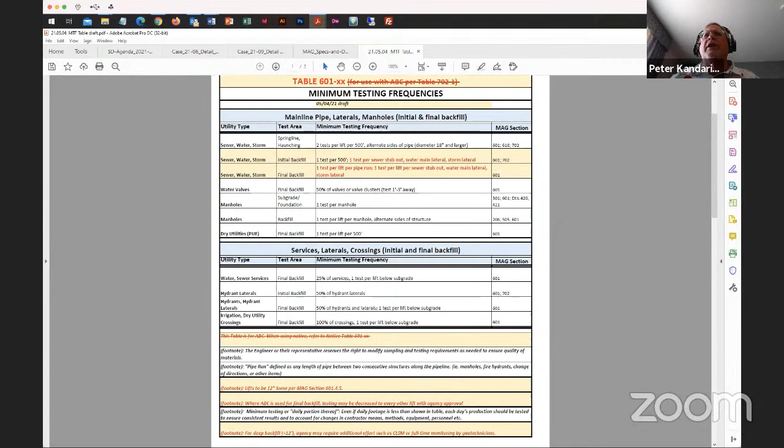One suggestion on that: we've been working on some similar specifications for other entities, and we've been putting this type of table or information within a quality control section of the specification for trench installation or installations. It would go along with any other testing requirements. The density table goes under compaction. The frequency table goes under quality control. And we saw some national standards doing a similar thing. So just a suggestion.

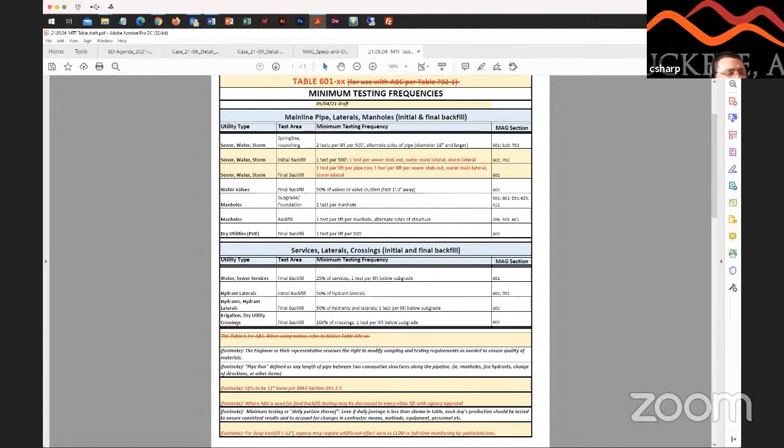So. All right. Well, thanks, Rob. You guys have done a lot of good work on that. Yes, you have. So. All right. But yeah, I like this. Gordon, I want to put this as a new case next month. So anyways, thank you, Rob. Trying to get through this thing in time.

Let's see if we can move on to the next item, extending length of clay pipe from 1 foot to 2 foot at the manhole. I believe Phoenix is going to be, is it Phoenix that's going to be pitching this as a case? Yes, that is correct. Can you hear me? Yeah. Got the microphone fixed now, so you're ready to go. All right.

So yeah, I've had some people from our group talk to NCPI, and I've invited them to the next working group to provide their expertise on the flexible joint. I know the main criteria they've got is that there's 2 points of flexibility within 36 inches of each connection. So we go to 1 foot, 2 foot, or even out to 3 feet, depending upon the pipe size.

The other thought that part of our crew was looking at, and I kind of throw this out, this isn't really pertaining to the length of pipe coming out, but the anti-flotation ring, or the extended bottom, I think is what we actually call it. Maybe removing that on the detail and just making a note on there that buoyancy calcs shall be provided. So that was a thought that our group threw out there.

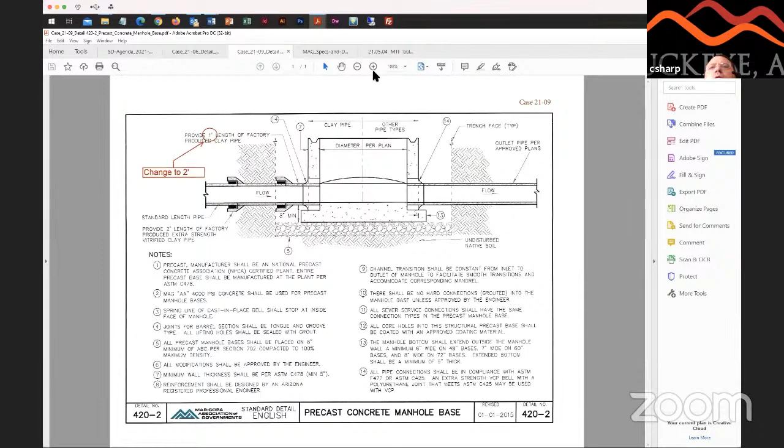Sediment trap details. I'm not sure, Peter, is that? Yes. We're very close on that one. We're really just getting the cover letters, getting a little bit organized. It's a bit new for some of our folks to be presenting it. Likely it's going to come through the City of Tempe, and we're anticipating the June meeting will be presenting the sediment trap case as it's been put together.

The other cases, I'll talk about a little bit more on the update. The vegetative rock bioswale detail is getting closer; that's probably going to be more of a presentation or case in, I'd say, July. It's probably going to push to then, but we're getting closer on that one.

And then I might as well jump into the landscaping details. They're not details, I'm sorry, landscaping sections 425, 430, 440, 757, and 795. There are currently drafts of 3 of those ready to go. They're being reviewed by the committee members. Our meeting at the end of the month will be the one where we get our last ones. We're looking at having those also ready for the July meeting, with those 5 specification revisions.

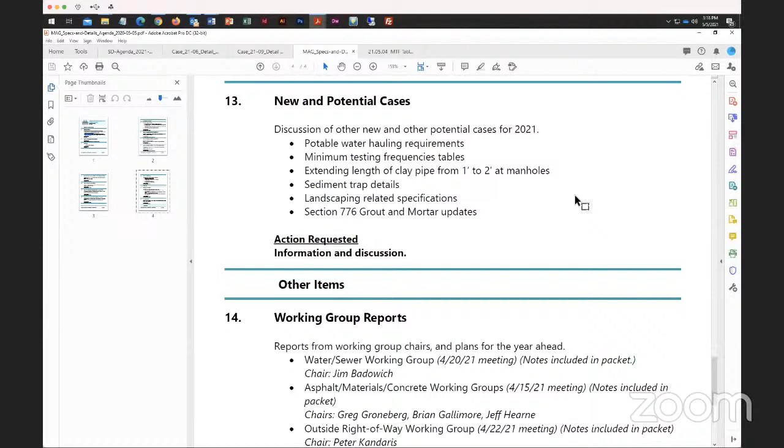Greg, I think you're muted. I do it every time. Thank you, Gordon. Thank you, Greg. I think you're going to have time to make your meeting.

So if we can move on to the water and sewer working group, Jim, do you have an update? Not really. We met last month, discussed everything we pretty much talked about today. Our next meeting will be on May 18, 1:30. Okay. I guess moving on, Peter, I know you touched on some of this stuff.

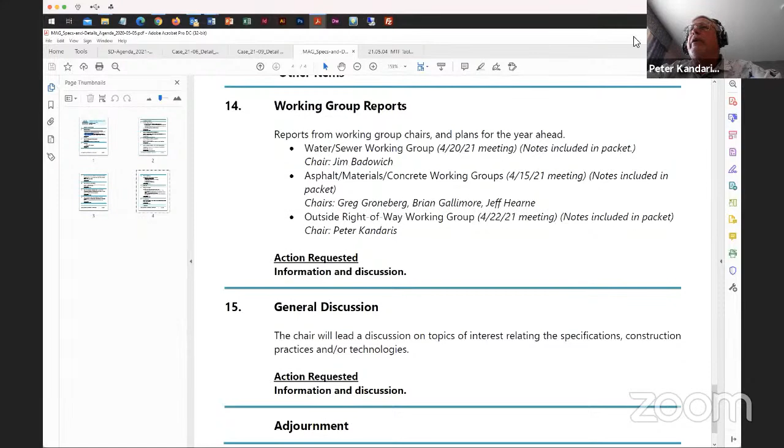Yeah, we had our meeting, and my apologies for not getting the minutes to you quicker, Gordon, but I think you've got copies for everybody. It's on the website. Again, we're getting great attendance. A lot of the people I'm starting to notice are showing up on these meetings too, and we're starting to get more focus on this.

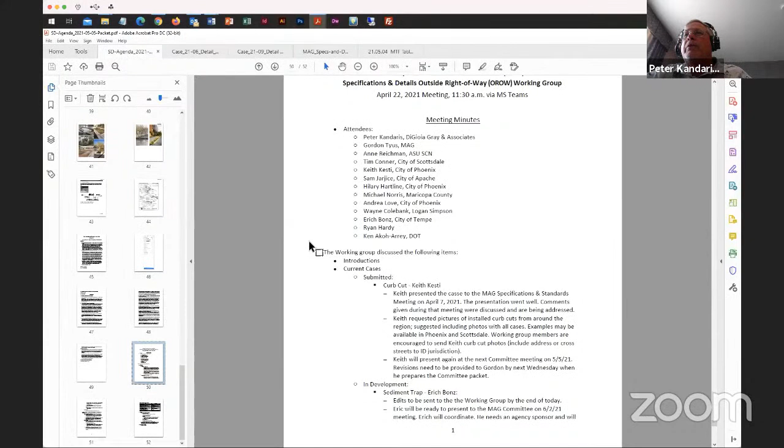Keith went through talking about the curb cut details and asked for participation in getting the photos. I think we had really good efforts by people. We saw a number of those photos in the packet to give you a real feel for it. One of the things we thought about, and I think we're going to do this as we bring forward these cases on different things they haven't seen before, is to have photos to show you what they look like in addition to the case, to try to help the process along. So we're going to be looking for those as each of these cases move forward.

Again, we talked about the case for the sediment traps, vegetated bioswales. Again, they're moving forward. The landscape and irrigation standards working group, sub-working group, continues to meet. I think they did a great job on getting those first three out. I think we're going to see in the next week or two the other two come out. Again, we talked about those. I think we just got to keep everybody focused.

City of Tempe apparently has a lot of these details that exist for some of these irrigation and potential landscaping details. And so Erich with the City of Tempe is going to be looking into getting those available so we're not reinventing the wheel. And again, we're looking at that thing we always like to do, which is get rid of the city supplement and have it become a MAG standard in lieu of that. So that is becoming the next scope focus on looking at some more of those items.

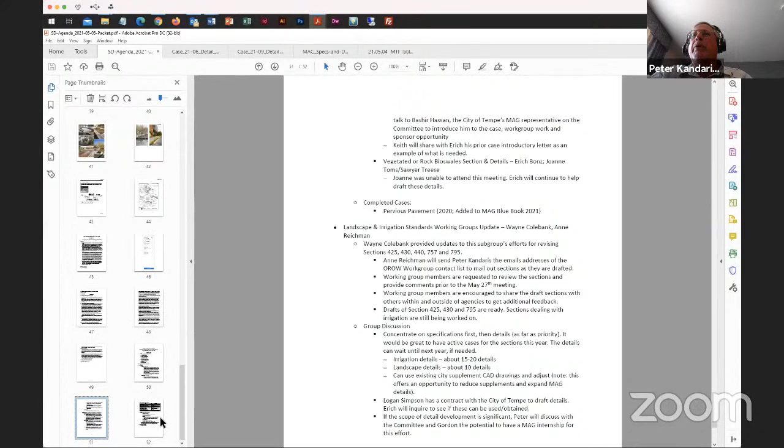We talked about what other potential cases we would be looking for down the line, and we had a short presentation discussing this. Oh, yeah, and Gordon's got that up now. Thank you. In terms of the schedule for the landscape details, you kind of see it's a very ambitious schedule, but the idea is we want to have as much ready as possible this year and it's just going to roll right into next year with additional ones. So this will be the first major upgrade of a lot of those landscaping details in well over 20 years, with a lot of new information and basically updated most current standards, which is really going to be nice.

We decided to come up with a list, so we're ready to go after we get this batch out. What do we want to work on next? And so you can kind of see the list that we talked about, obviously the detention tanks and the dry wells and the swing check valves, backflow preventers. But we wanted to look at what other outside right-of-way, low-impact development items could go in there. We also included some things like curb extensions, the gabion wire baskets. We see a lot more of those being used in the right-of-way, next to the right-of-way, outside the right-of-way. I thought that may be a good one to go at.

Pavement parking lots, we probably want to talk and work more with the materials and asphalt working group to see if we want to start moving that way. And then we looked at some of the current ones, whether they should be in the right-of-way or outside, but we don't want to lose track of those. Gordon brought up some potential work with the sewer and water working group in terms of how work outside the public right-of-way can impact work inside the public right-of-way. And I think that comes to some of the stub out details you were just looking at. And just again, keep the dialogue between the different working groups open so we know what they're doing, they see what we're doing, and see where we can help.

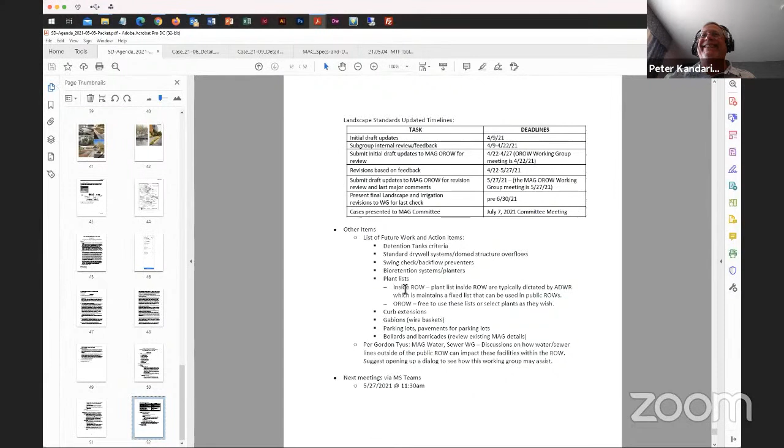Take care. So I guess from there, we're just going to move on to item number 15, the general discussion about anything relating to specifications, construction practices going on. I don't have anything. If anybody's got any new technologies or something that they want to talk about or bring up.

Hey, Craig, the only thing I've heard about is Crown Castle and the micro trenching. It's come back through us. I thought I saw that Phoenix had a pilot program, and I saw some email from Mesa and Chandler going on. So I didn't know if anybody had approached you about a case, and I'm not promoting that in any way because we have some issues with the micro trenching, but I'm just seeing a lot of activity and a lot of email, and they're not always going to staff. Sometimes they're going to city management to try to get the micro trenching approved. So I just didn't know if anybody else, Ryan or Jim or Craig, heard about the micro trenching?

Yeah, I know out here in Buckeye, we haven't heard anything, but we're not a real proponent for it. I mean, it's not anything that we're going to completely object to, not at this point yet. But we actually have development create easements specifically for dry utilities. So putting them in the roadway is not something that we would really like to do. But no, since the presentation we had from them, Buckeye, that I know of, we haven't heard anything. So I don't know about other cities.

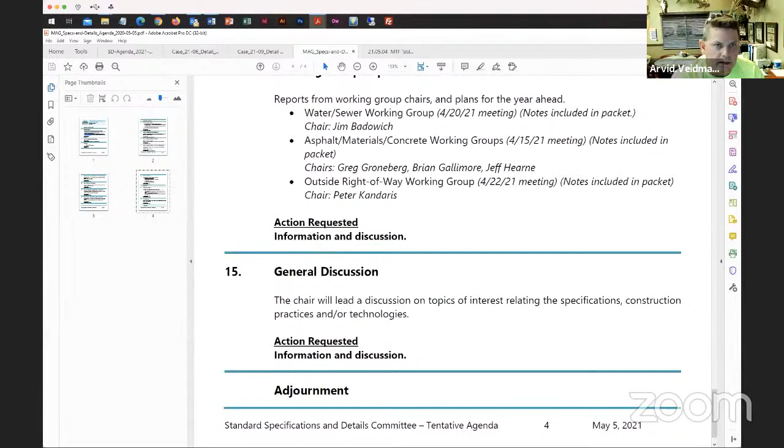Underground infrastructure is buried under the road, either in earthen backfill or slurry backfill. If you take an APS, SRP, or comm duct bank with slurry encasement, it's easy to find because you can pothole down both sides. Water lines, sewer lines, gas lines, you can find stuff. If this thing is buried in a trench in asphalt, how do you ensure that it's not going to get damaged during construction of the project? Those are questions that have to be addressed, not so much at our level.

Practically speaking, if they as-built the micro trench and identify the depth of it every 20 feet, let's say, that's fine. We know where it's at and we're putting in whatever 18 feet below them. But still, you can't open cut across there, and you still have the law that says you've got to find it. So how do you do that if it's in an asphalt road? Those are things that are going to have to be asked at some point.

When Gilbert was approached about micro trenching, the issue we had internally when we discussed it was that the deepest they could go was around 1 foot to 14 or 15 inches, I think. And for your major and minor arterials, which are most of the streets they wanted to go into, it puts it into your structural section. So you're going into AB.

And the issue we had with it is you're saving them costs in their installation to further complicate your future full depth replacement of the roadway. 100%. That was our big issue. To Arvid's point, if it's in the asphalt, every time you go to do a mill and overlay of that roadway, say every 7 to 10 years, you're tearing out their fiber optic and having to reinstall it, and they're going to have downtime.